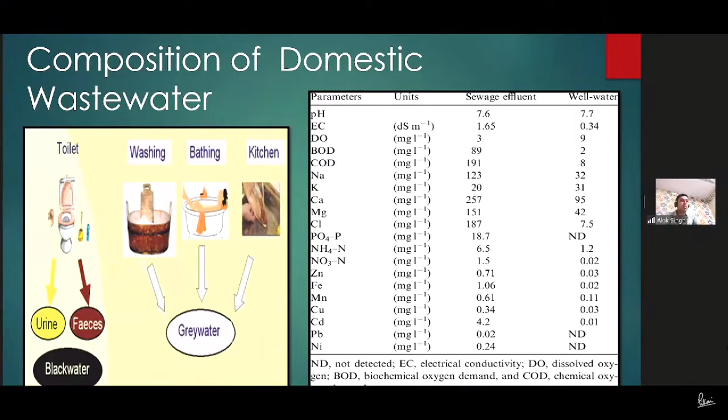So let's describe domestic wastewater. Domestic wastewater can be classified into two things: black water or gray water. The water used for toilet, which is urine and feces, and the flush water is called black water or sewage. And the water used for washing, bathing, and kitchen is called gray water.

The difference simply is that black water is more difficult to handle and more difficult to treat. It contains more pathogens and more organic matter, while gray water is the lighter fraction. It's easy to treat and it is much more suitable for applications if treated properly.

Now the next image gives some parameters. I will not go into the details of the parameters, but these are some criteria by which we judge the quality of water, whether it's suitable for drinking or not. If we say a person is tall, we measure the height in centimeters or meters. If we say he's fat, we measure his weight in kgs. So everything has certain parameters which have to be measured properly so that we can determine the quality or quantity.

So for wastewater, there are parameters like COD, BOD, nitrogen, salts, dissolved solids, etc. And all these have to be within certain limits so the water can be acceptably discharged into the water body. This is what it is.

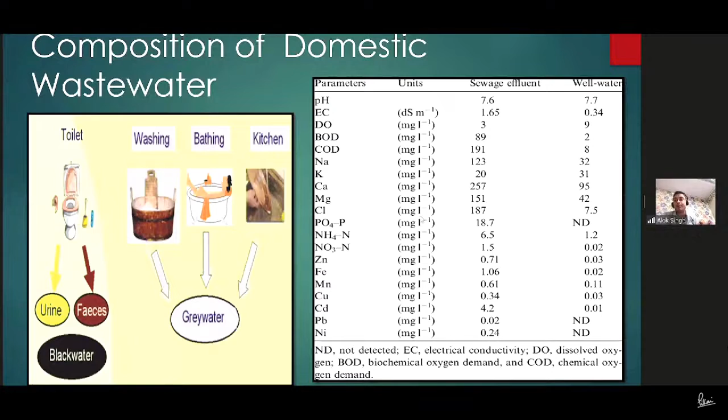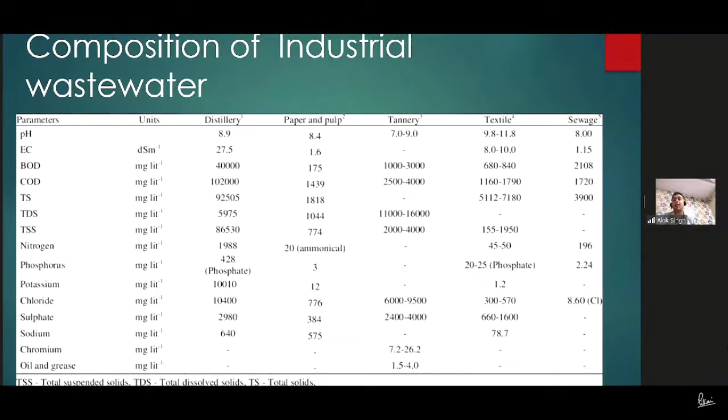Similarly, there is also industrial wastewater. Industrial wastewater depends completely on the type of industry. The quality of the water will be completely different because every industry has different processes, different chemicals, and different raw materials. So the quality of water varies significantly from industry to industry. One industry might not have the same type of effluent as a nearby industry. That's the variation you will find.

And the parameters are way above the normal parameters. If you check the fourth column, the COD, in the last column I have given sewage for comparison. Sewage has a COD of around 1800 or something like that. But the same for a distillery is 1,02,000. That is the amount of pollution they're generating. For textile it is a little less, around 2,000. You can see the amount of variation in that single parameter. That's the amount of variation we'll find in these kinds of industries.

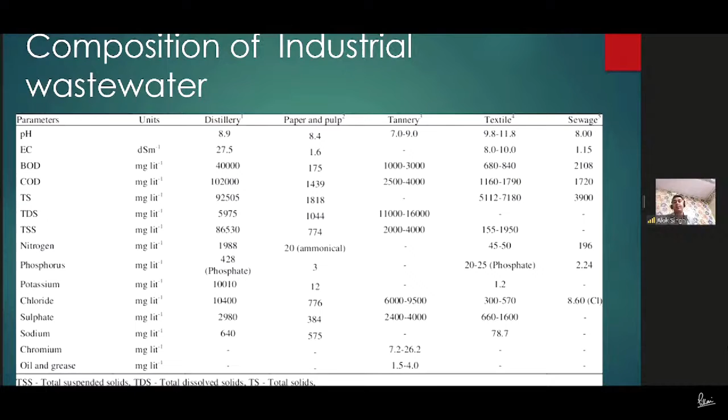So let's go to the next slide. We'll not go much in this. Okay. So if you talk about the process of wastewater treatment, the steps involved completely depend on the effluent and the industry and what is the discharge norms for that industry. If they want to discharge a particular criteria, they'll meet the criteria with whatever steps they can. The same goes for sewage, the same goes for the industrial effluent.

The process is same, just some steps are added or some steps are removed, depending on the end user requirement. Okay. So the steps are basically collection of water, a preliminary treatment, a primary treatment, a secondary treatment, a tertiary treatment, and finally discharge or reuse. So the next slide, please.

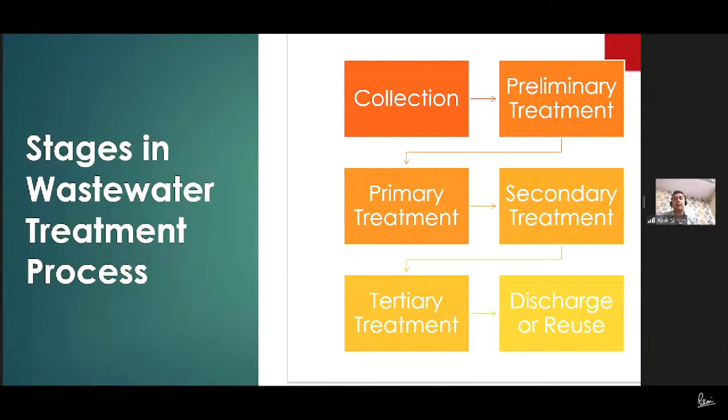And now I will describe you the basic steps of treatment involved in the industries. Okay, so this treatment, specifically preliminary treatment, is mostly done for the sewage water. When the water comes in bulk, these kinds of steps help in reducing the initial load. So there's steps like screening, grit removing, and gravity settling.

So what happens in these steps is that basically the water contains some amount of stones, some pollutants, some plastics. Some amount of the sewage water will not be only purely water. It will contain some amount of garbage which has been dumped in the water. So the requirement of screening is to remove that garbage.

So you can see the first image. That's a screen. It's a bar screen and it has a conveyor belt. You can see on the belt there are some things like tires, plastics, etc. There are some branches coming in the stream itself. So to remove all that, this kind of technology is being employed.

The second image is a grit remover. Basically, what happens is that the water is being settled in a cone, and the grit which comes is being removed, and the water then goes for further treatment. Okay, gravity settling and grit removal is the same step. They just allow the water to settle, and the effluent and water is separated. Okay, next slide, please.

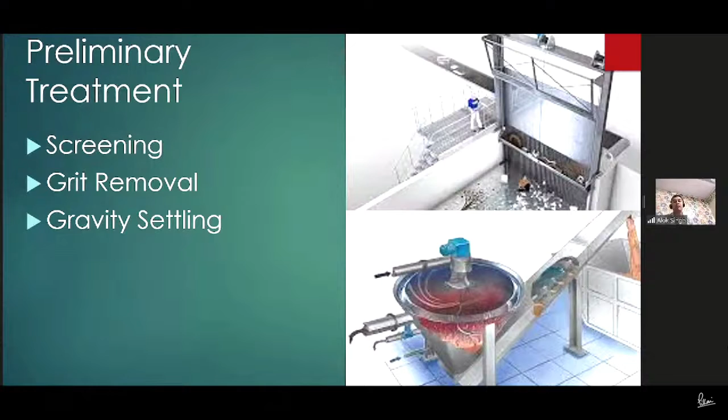Okay, so now come to the primary treatment. Primary treatment is an important step in certain industries. It's not usually done for sewage wastewater because it doesn't have much amount of solids. Okay, so the primary treatment basically involves two steps. It is coagulation and flocculation. So what happens in coagulation is that you add certain chemicals like alum or like ferrous sulfate, etc., to make the particles heavier.

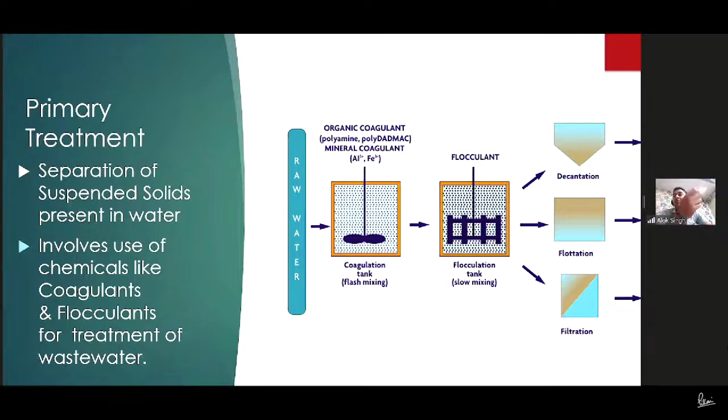Okay, the water contains two kinds of particles. If you take a raw water sample and you mix some mud in the sample, you will find two kinds of impurities in the sample. One will be the particles which are suspended, small particles, and one will be some particles which are dissolved in the water, which we cannot remove physically. So to remove the suspended particles from the water, we do kinds of treatment like primary treatment.

So you add some coagulants like alum or ferrous, aluminum or ferrous, and then you add a flocculant. Flocculant is usually something called as polyelectrolyte, which binds the particles together. Coagulation creates the particle, and flocculant binds the particle, and then you settle those particles by gravity settling in the next step, and the water you can take for further treatment. The next slide, please.

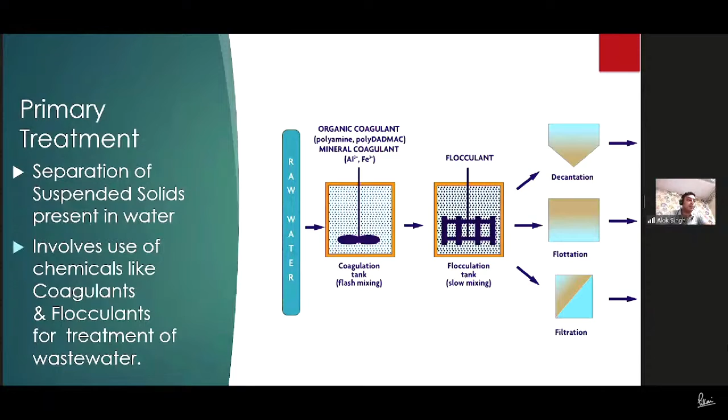Now the secondary treatment. Like I said, the water contains majority kind of impurities. The simple impurities can be removed by primary treatment, but the rest are removed by secondary treatment. Secondary treatment usually involves a process called as biological treatment. It's completely done by bacteria or microorganisms. Okay, so the microbes basically consider the water as a food, and they survive on that food and they treat the effluent. It's a simple logic in that. Okay, so the requirement of biological treatment is to remove pollutants like COD, BOD, color, etc. Okay, so the next slide, please.

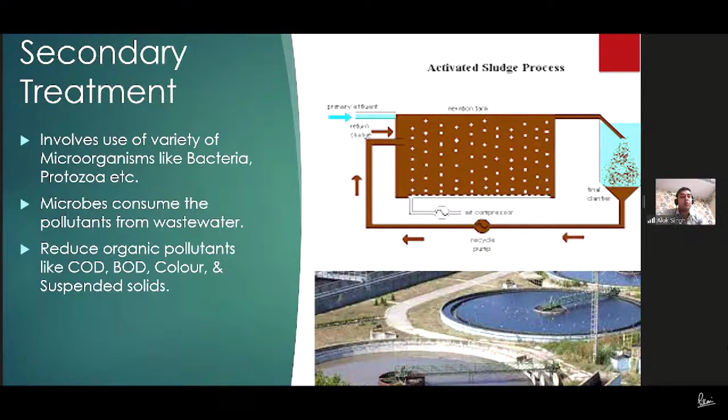So there are two kinds of biological treatment in secondary treatment. It can be done either in anaerobic conditions or in aerobic conditions. Okay, in aerobic you provide oxygen. In anaerobic you don't provide the oxygen. It's as simple as that. Nothing rocket science about it. Okay, so there are different kinds of processes for different effluent. In aerobic there is activated sludge, MBBR, SBR, MBR. If you want, you can note this slide and you can go in details about this later. I will not go in depth in that because it will become too technical for you.

And in anaerobic treatment, you have UASB, you have AHR, you have CSTR. These are all reactors, but basically they all contain bacteria and other microorganisms which are used for degrading the effluent. It's as simple as that. Anaerobic processes produce something called biogas, which is used as a fuel for the generation of electricity or as a power source. But the advantage of the aerobic process is that it is faster and it is very easy to maintain compared to the anaerobic process. So the next slide, please.

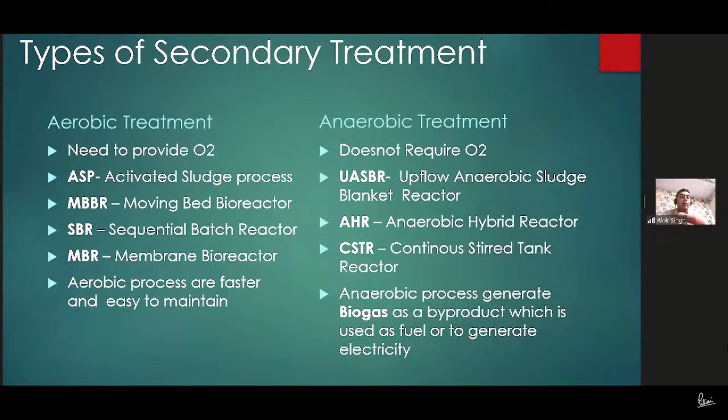Now we come to the tertiary treatment. So what is tertiary treatment? In primary treatment, we removed the solids which were suspended. In secondary treatment, we removed the organic pollutants like COD and BOD, the organic matter in the water. In tertiary treatment, we usually polish the water. After secondary treatment, the water has to be polished before it can be discharged.

So in tertiary treatment, there are many steps, many possibilities. There is simple filtration via MGF and ACF, that's sand and carbon filter. Or you can do an MBR process via ultrafiltration, or you can go for nanofiltration, or reverse osmosis. These kinds of things are available for tertiary treatment. But what you will use completely depends on the demand of the end user.

If the water simply has to be discharged, like sewage water, they basically do simple steps like sand and carbon filtration. If you want to reuse the water, some industries like textile industries reuse their water. They treat the water and then take it back to the process. So it effectively reduces the quantity of water they require in the factory, because water comes at a cost. If you buy the water from the government, you have to pay some amount. But if you reuse the same water, the amount to be paid is less. That's why they go for these technologies.

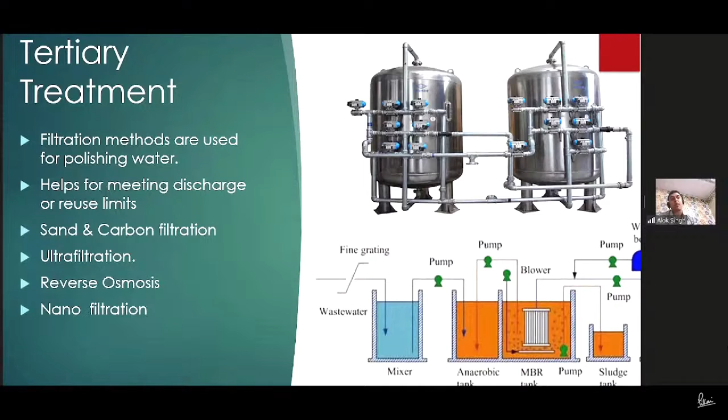So then we come to nanofiltration and reverse osmosis. What is nanofiltration? It's similar to ultrafiltration, just the membrane is even tighter. So even smaller particles will get filtered, pushed back, and will not come into the fresh water. So that's a more advanced level of filtration. And lastly, there is RO. RO is something very common to us now. Most of our houses have RO units.

So basically, what is RO? You must have seen the osmosis experiment in your labs, when we put some raw kishmish in water and it swells up by morning. That is simple osmosis, where water goes from a low concentration to a higher concentration part through a semi-permeable membrane. But in reverse osmosis, we apply external pressure to the water in the higher concentration part, and instead of going in, it goes to the other side, where the dissolved solid content is less.

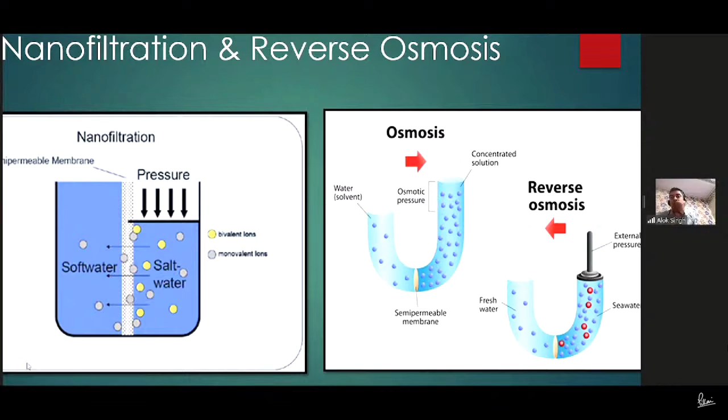Okay. So if I give a simple analogy of the filtration steps, you can see that in microfiltration, in the first image, if you focus, there are a lot of things which can pass through that. The water contains many things. It contains bacteria, some oil, some macromolecules, some viruses, some proteins, some compounds, some ions. So every step, the efficiency increases in filtration. In microfiltration, you remove all kinds of bacteria, big molecules, and colloids.

After you go for microfiltration, the water might contain some viruses, proteins, smaller molecules, small compounds, and ions. But if you go from microfiltration to ultrafiltration, it will remove those small viruses and proteins. Only some small compounds and ions will pass through ultrafiltration. And nanofiltration even removes those small compounds, and only some small ions like sodium ions or chloride ions pass

through nanofiltration. Like I said, only some small dissolved solids can escape nanofiltration and go up to reverse osmosis, and those are removed in the reverse osmosis membrane. The ions are all removed, and you get clear water of very low TDS and solid content. Okay, so RO is currently the best technology that we have for treating water.

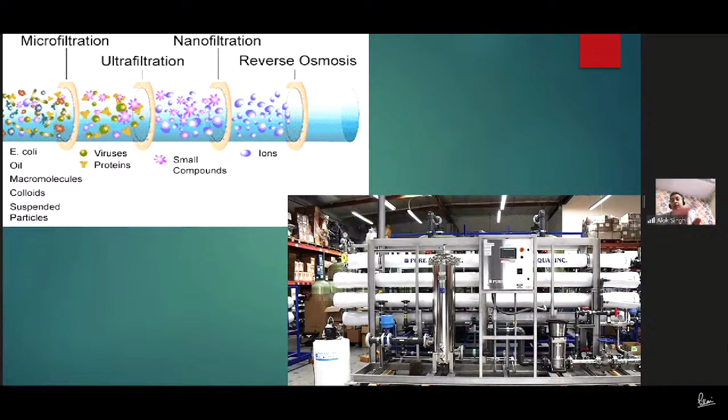Okay, so that amount of pressure you have to apply to the water, and then it will pass through the membranes, and the solids will be removed. So this is the last of the treatment. Next slide, please, Aslisha. Okay, so that was the end of the treatment technologies.

So now what can we do as a citizen? What is our role? Because what I explained over here, these things cannot be done by a single person. This can either be done by an industry, or by the government, or by some very powerful persons. Not everybody like us can do it. I cannot apply a big scale RO unit at my house. Max to max I can afford is a small unit for my drinking water needs.

So what can we do? As a citizen, we can spread the awareness about water pollution. The more people are aware about it, the more people are aware about the norms. Because if you ask normal people, they are not aware that there are some criteria which have to be met for the water to be disposed in the environment. They are not aware that water pollution is a serious problem.

They might be aware, but they are not that sensitized about it. They don't think about it in a detailed manner, and they are just aware it's something, but they don't have the correct idea of the extent of the problem. So spreading awareness is something which can be done as a normal citizen. As students, you can spread awareness about it, because the more people are aware, the more they will try to prevent it.

Then you can make sure to purchase the products from industries which are environmentally responsible, because industrial pollution is a big problem. Their aim is to make profit, but if they cannot make profit, then there is no point of starting the industry. And the purchasing power is ultimately at the consumer level. We are the consumers. We have to buy the products at last. So if we are not buying products from an industry which pollutes, the industry will shut down automatically.